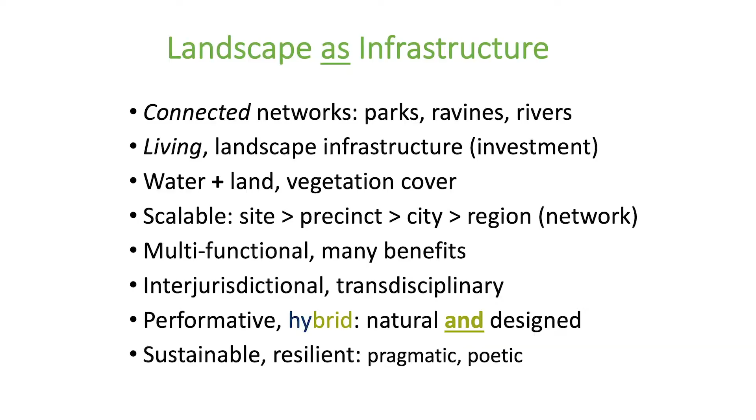So these we're talking about in this lecture are connected networks of landscape. In the Toronto context that I'll use to illustrate examples, they are parks, ravines, rivers, and waterfronts. They are also alive—the infrastructure itself is a kind of living surface. In that respect, when I refer to landscape as infrastructure, this is a kind of investment in water and land. Notice that I'm saying vegetation cover.

Now, I'm not specifying native vegetation or non-native, but rather a broad class of vegetation that at this moment, while we may wish for it to be as native as possible for its own resilience, increasingly as our climate shifts, the gradients, particularly from the equator north into our climates, are shifting and changing the kinds of vegetation we will see. So it's less than ideal to say they must be native, because it will very soon beg the question, what is native? We might more realistically and practically say naturalizing vegetation, some of which is desirable and some of which is not.

So please understand that there are, of course, a number of questions that have to do with social and cultural policy and have to do with scientific research embedded in these statements. I recognize that, and I ask a little bit for your indulgence that I'm speaking at a fairly high level here at this point. I'm also recognizing that we need partnerships to work with experts, ecologists, hydrologists, engineers, geomorphologists in some cases, plant botanists, people who are expert in each of these fields so that we can determine what kinds of vegetation in what place we're talking about. So here, for the moment, it's fairly broad.

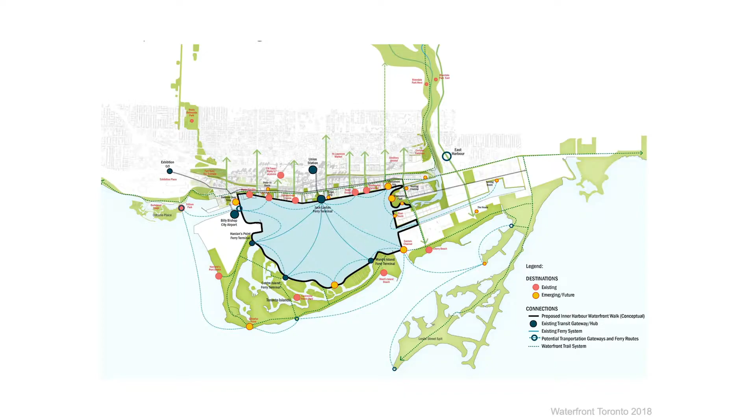There are a number of policies in place, and they don't always work nicely together. No one is particularly in charge here. These are policies that work sometimes in overlap, sometimes with a little bit of tension between them. But they include, for example, North America's first zoning bylaw requiring green roofs. Not innovative in Europe, but in North America, the first initiative for commercial institutional buildings.

Toronto Green Standard sets the framework, regulatory and advisory, for green buildings, for mid to high-rise residential and non-residential or commercial development. We have a parks and forestry policy for green canopy cover of trees. We have a policy that is actually a set of guidelines about how stormwater is to be managed. None of these supersedes the other. We also have an official plan that sets the vision for the city that works in tandem with zoning bylaws. So this agglomeration is really a mosaic of strategies we can use to advance green infrastructure. We don't always use any of them in some places of the city other than the official plan.

As a waterfront city, our city has for the last 30 years been studying contamination on the Great Lakes, in particular in Toronto, which is one of many areas which were called remedial action plan areas. Over the course of development in the 20th century, the ports and harbors became contaminated. This would not be a surprise to you as a shipping city. And since the decline of manufacturing and the move towards a more knowledge-based economy, we've seen these areas stagnate.

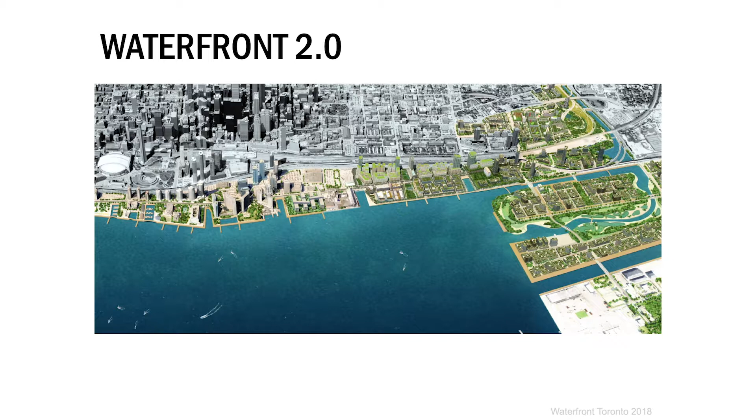And I want to hop through it, if you will, in a kind of a design tour of the nature-based or landscape-based solutions that are building this area out. They are not being designed specifically as standalone or isolated parks, but rather as a connected system of landscapes that will host the next generation of our city dwellers.

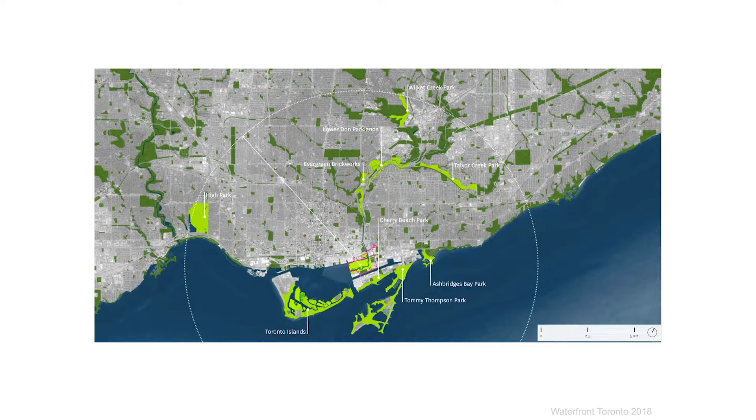They are in part capitalizing on existing local parks, but also making new destination parks as the entire riverfront and lakefront are designed together. The areas highlighted in green show you some of those. In light green are areas that are new and changing or being reformed. Areas that are in dark green are existing areas that are more naturalized, that in some cases are going to have design interventions that connect them to the light green.

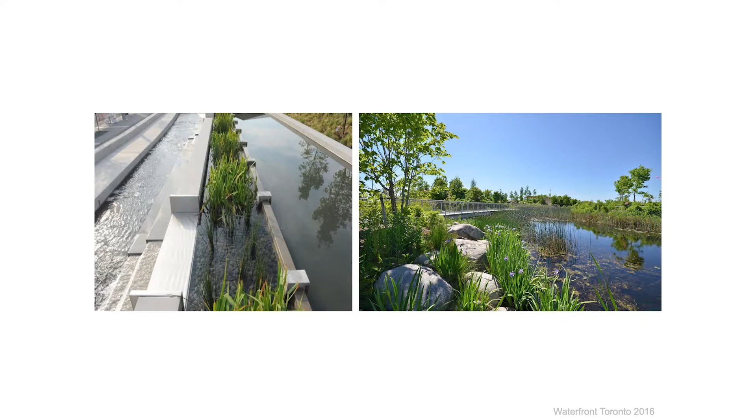These parks along the waterfront: on the right-hand side of the screen, we're looking at Corktown Common's Iris Garden, Stormwater Garden. This is part of the flood protection berm that protects this area of the city from flooding by the river. And on the left-hand side is what looks to most people like a pleasant water feature. It's pretty, it has daylilies in it, or rather blue flag iris in it. It is actually a stormwater infiltration and cleaning swale that takes water from a series of parks back to the lake. In fact, it represents also a challenge to the city.

This park was budgeted to be a naturalized, nature-based solution to stormwater overland flow. And city engineers and city parks people are in two different departments. And the city engineers did not have confidence that green vegetation would do the job, that it could treat the surface waste, and this is principally E. coli bacteria from dog parks and from people in the park. The water is treated before it returns to the lake. And so what they did was insist that the development add on a UV filtration system underground.

So this is an example of a nature-based solution, a piece of green infrastructure that was designed to do a job which some would say it could. The engineering department had never approved one of these and wanted to make sure it would work. And so an additional significant investment was required to build a UV treatment plant.

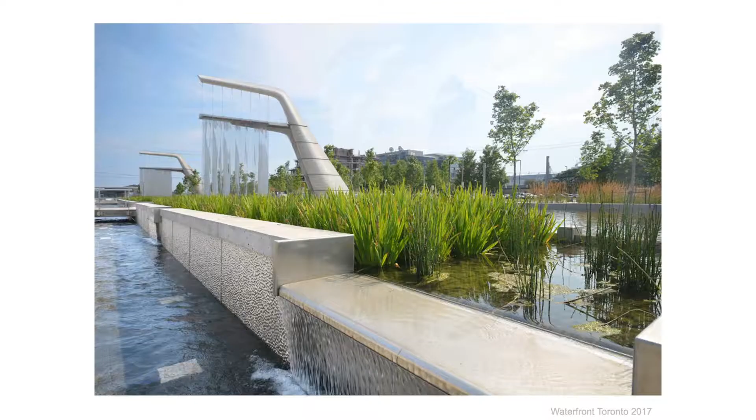One wonders whether that's necessary. So we don't always have confidence in these designs. The art sculptures at the back are by Jill Anholt. They're part of the park's appeal.

And it is also an architecturally significant park. It has a pavilion, very beautiful pavilion designed by Steve Teeple, and a skating rink in the winter or a pond in the summer. So these can be several things at once.

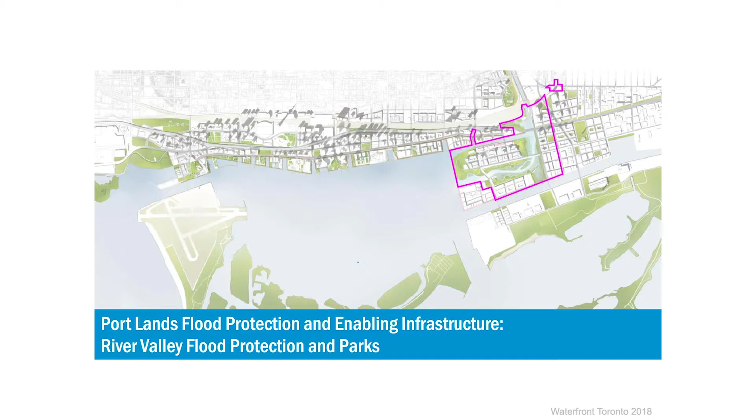The major piece of investment in this area is a flood protection infrastructure that is on a scale our city has never seen before. This is 290 hectares inside the pink square and is designed to protect the city from the lower portion of this river, which is the downstream part of the Don River. It's a 365 square kilometer watershed that drains into this pink bounded area.

And what's interesting about this watershed is it's the largest urbanized watershed in the country. So there's a lot of detritus and contamination that is coming down this watershed into the river area, and it can flood in a flash storm quite severely.

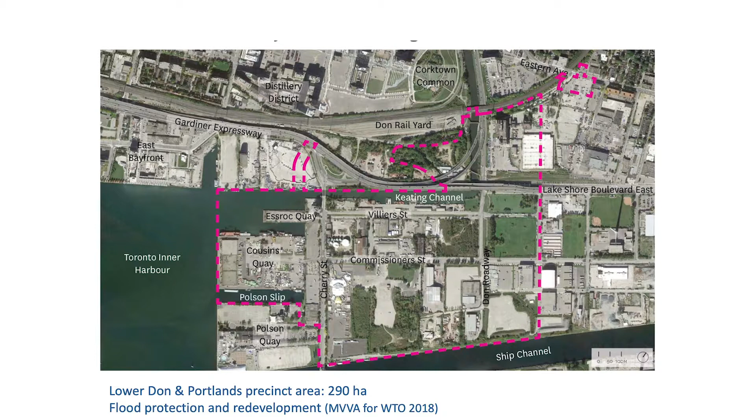So this is what the area looks like now. It is a post-industrial area. It's been quiet, you might say, economically for the last 30 years. And it's slowly being rebooted economically by new industries and mostly by a major change to the river, which is going to cut through it.

And it will also move about 1.4 million cubic meters of soil. It's going to excavate from these areas to create a new lake, or a new river rather. And in doing so, will allow the river to divert away from a more built-up portion of the city and therefore protect from flood.

It's a new river. And one has to ask the question, how do we design for a new river that is intended to look and feel like a river, but must be armored in an engineering way? It doesn't look like a Dutch dike. It doesn't look like a ship channel. It looks like a real river.

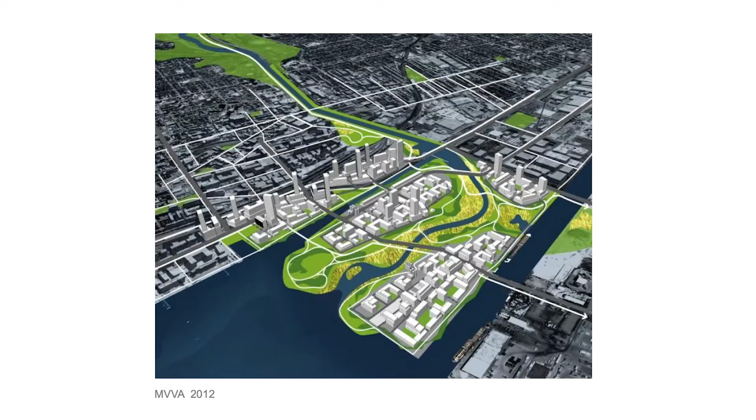This is an area of the city that will be defined by the river, rather than having the river subsumed and defined by the city, which has been our traditional approach to doing things. And certainly in most European cities, we have rivers that are constrained and defined by their cities, not the reverse.

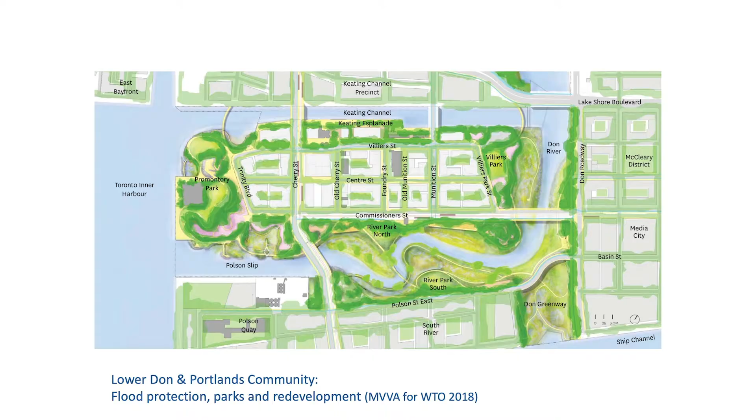This is an artist's rendering from MVVA. Michael Van Valkenburgh Associates are the landscape architectural firm. And of course, there are a number of hydrologists. As you might imagine, this is a major hydrological engineering challenge. It's also interesting; to make this river look natural is challenging. So it combines a number of different areas of expertise in doing so.

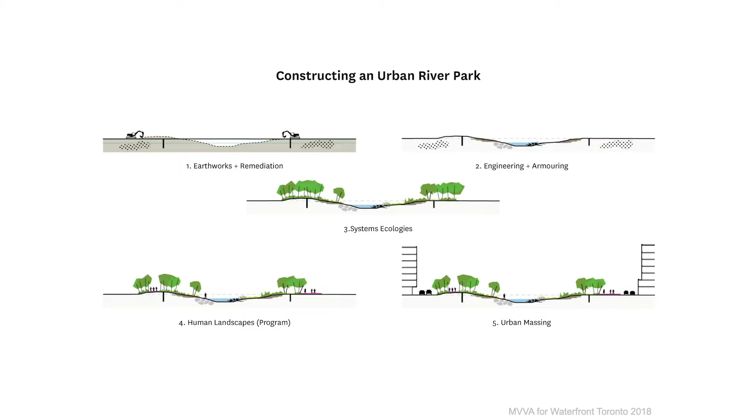So the investment potential here is principally in flood protection, but the benefits on top of that $1.25 billion investment are enormous, with 6 new parks, 4 schools, and a community of, let's say, approximately at the low end 70,000 people. We have systems ecologies that have to be considered, in addition to the standard hydrological engineering, which actually is not standard because the river doesn't look like a channel anymore.

We also have many layers of human program that will go into this for recreation, cultural diversity, non-traditional sports fields, and most importantly, from my perspective, an accommodation of new urban biodiversity in these parks. They'll be designed very differently from our traditional parks by virtue of the river.

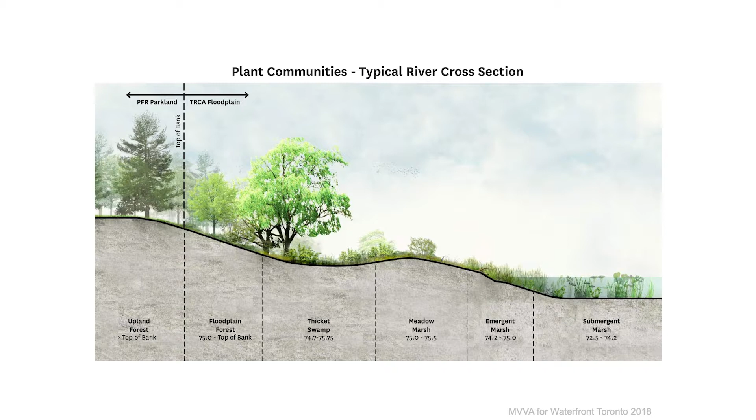And of course, the urban massing around this, which you'll see in a minute, is rather substantial. It's meant that this project also was led by landscape architects, not by architects. So landscape architects here are giving form to a new community. Typically we have architects that give form to a community, and the architecture will work with the landscape. It's not to say that they're not involved, but we begin the investment in green infrastructure with the landscape itself.

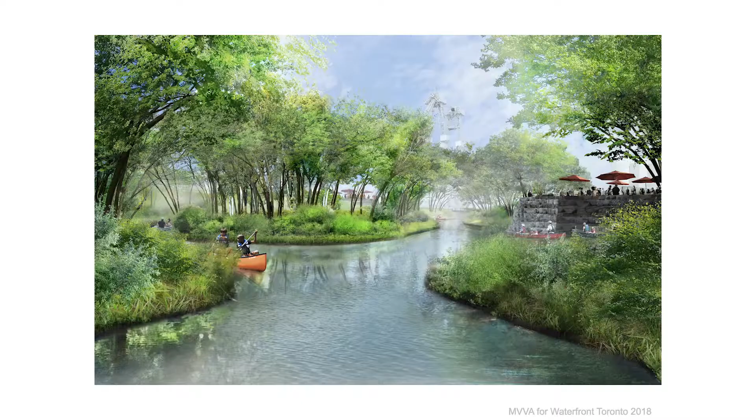And the images are projective. They're meant to show our population, our citizens, what is coming. How will we use these places? What will be the range of possibility? To date, we don't typically see downtown major urban centers with canoeing in them, for example, or kayaking, or turtles necessarily. And the parks that are planned are multifunctional.

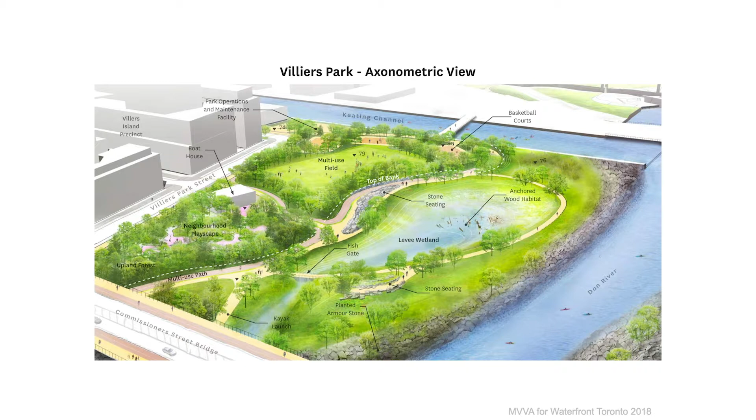They're planned as stormwater retention, wetland soaking and holding, with levees to protect from flooding, but at the same time giving topography, an introduction of 12 meters of topography in an otherwise flat landscape. 12 meters to allow for vistas, promontory viewing, walking, and of course, flood protection. So these, again, are multifunctional.

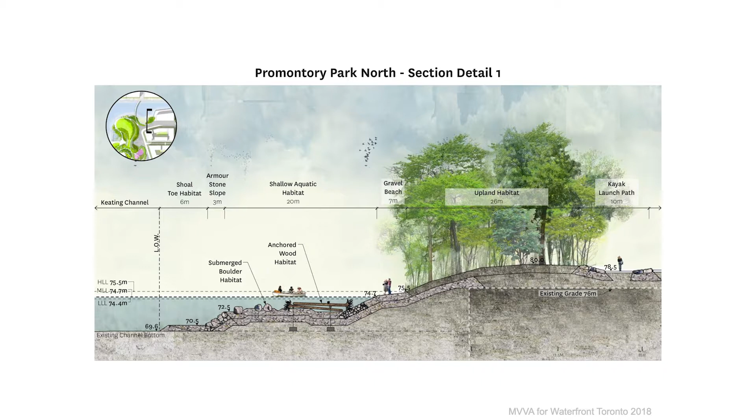And you can see from the sections, what's interesting from a design perspective is we've included ecological science, hydrological information, bathymetric data, so bathymetry of how deep the water is, to show a landscape below the surface of the water. We rarely see landscapes, aquascapes, as part of our city planning. And when you see the gradients here, you can understand how these shores are being naturally armored as well as armored with traditional engineering.

And of course, the lake is still functioning as a shipping channel. You can see in this image, we're reminded of the industrial past, but also the commercial present of the lake. It's not disappeared into memory. Some of these gradient habitats are of interest if you're in landscape architecture or aquatic ecology, because again, they're taking place in a city center. This is not a nature preserve, it's an active part of the city center.

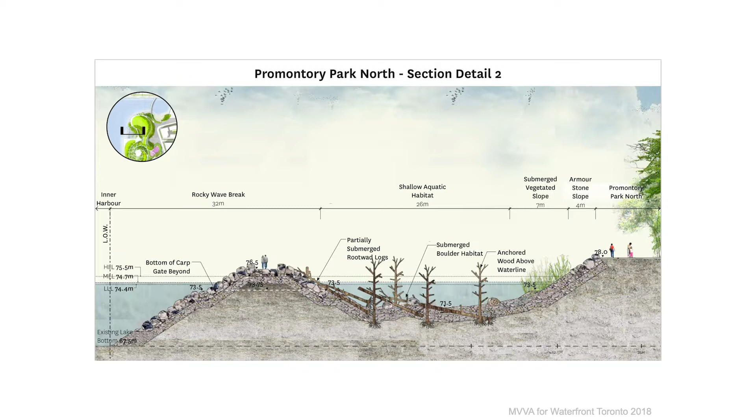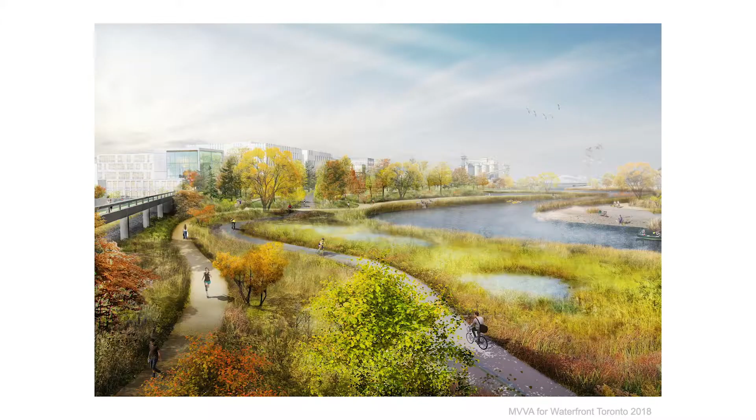They're also intended, of course, to be seasonal. These images are capturing our full 4 seasons, as you also enjoy in Stockholm. And most importantly, they don't just get shown in the summer. In all of the images, we see active transportation, people moving in ways that are not car dependent, which is one of the key missions of Waterfront Toronto, the organization that will stitch together and oversee these landscapes.

So what about connection? The linkages and the connections between these new spectacular areas of capital investment are critical. These can't be gentrified islands. The $1.25 billion investment cannot be only for citizens who don't yet live here. It has to be for the whole city. And when we think about the connections to the regional network and to urban biodiversity, we have to give safe passage, place to move for everyone, from young children to our senior citizens, as well as wildlife. And that's a tall challenge. It's a big order to do this.

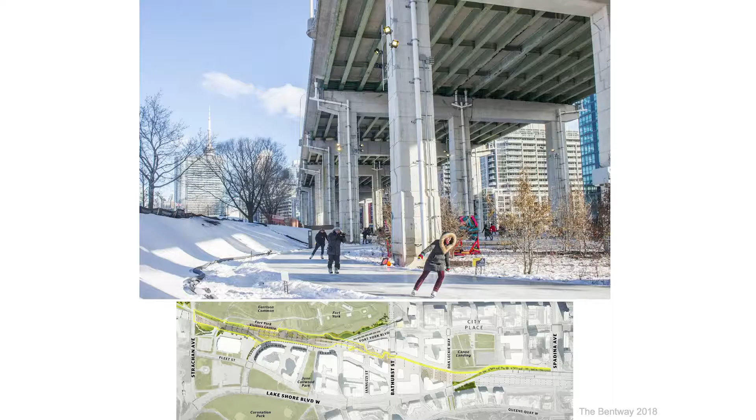We're looking at exploring connections between some of our more interesting parks that have made use of desolate and derelict areas. This area under an expressway has been turned into a skating trail. Our capital city of Ottawa has an 11-kilometer active trail for skating where people are actively using it to get from one place to the other, in the same way that Stockholmers used to.

I say used to because I don't know how many days the archipelago now freezes, but in historical imagery we see lots of people moving between the islands by skating. We don't know whether that is still possible under our changing climate. We hope that it is. It certainly adds to the robust ways of connecting through our city.

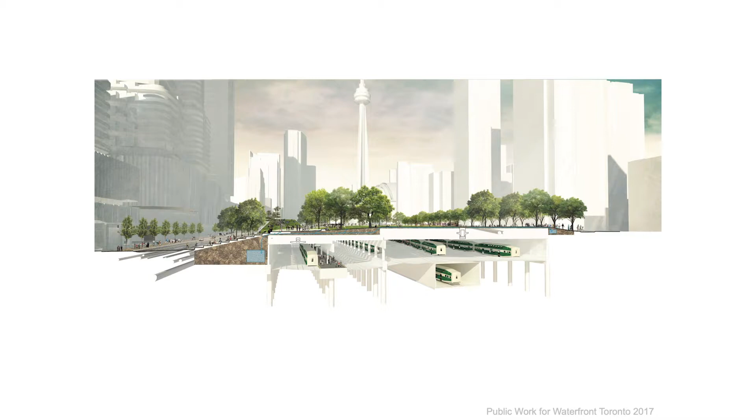We're even imagining multi-layered parks that make use of our gray infrastructure, another billion-dollar investment projected for the downtown core, where we have no possibility of at-grade park space.

In high-density urban areas around the world, we're challenged to make new surfaces for parklands. So we might think about green roof approaches that are low to the ground, in other words, an at-grade park being built over a rail tunnel. This is a proposal for Rail Deck Park in the city of Toronto, not unlike Hudson Yards in New York City.

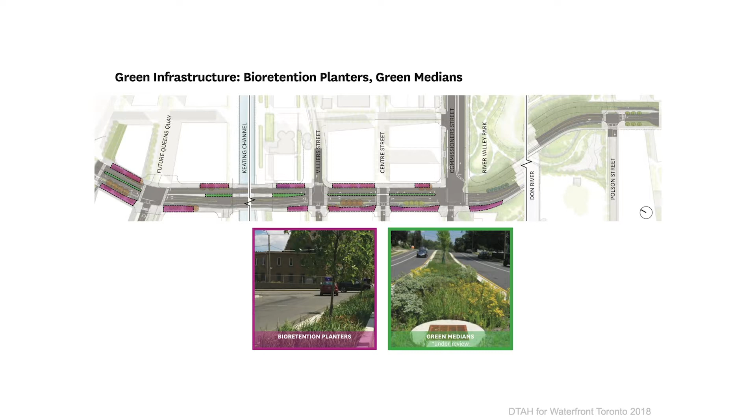Some of them are as yet untested. We don't know how well the bioretention planters and green medians will do. Our city doesn't yet have a mechanism to approve green medians in the same way that Amsterdam does, for example. But we're trying. We're testing in a place that has this big investment.

On the waterfront in the Villiers Island community, we're looking at pollination gardens, bioswales, all of these multifunctional planting infrastructures that are also about water holding, which need to be part of our streets. They need to take away a lane from the automobile and give over to the capacity for slowing, holding, and greening.

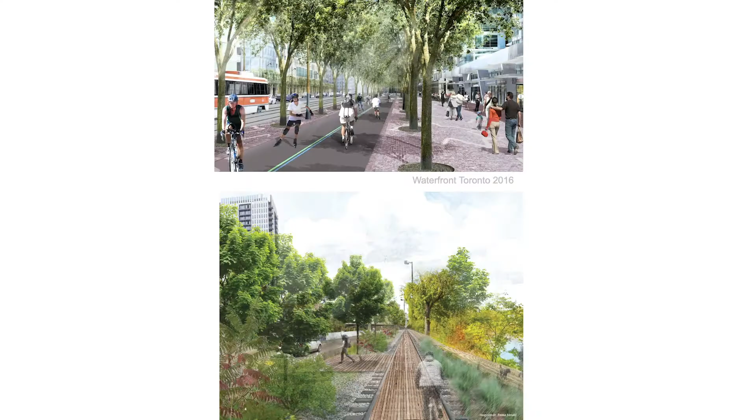Now we think about how to reintegrate the road, burying the service lines deeper and removing some of the road-based commuter possibilities, introducing active transportation and habitat possibilities. You can see in the lower image, completed by my students in a studio, this is intended to show multifunctional possibility for habitat. But of course, all of this has to fit in a limited range.

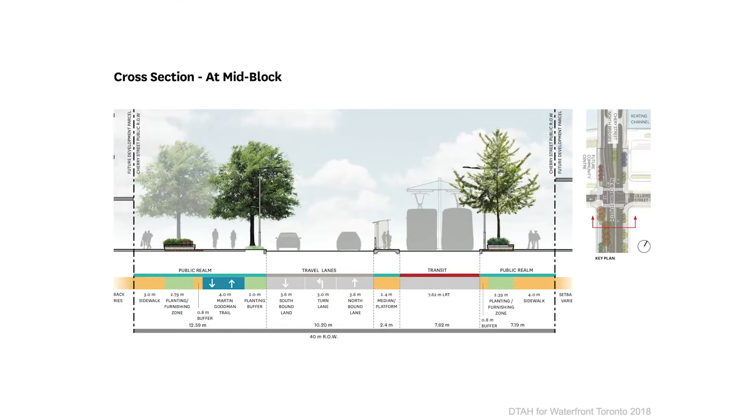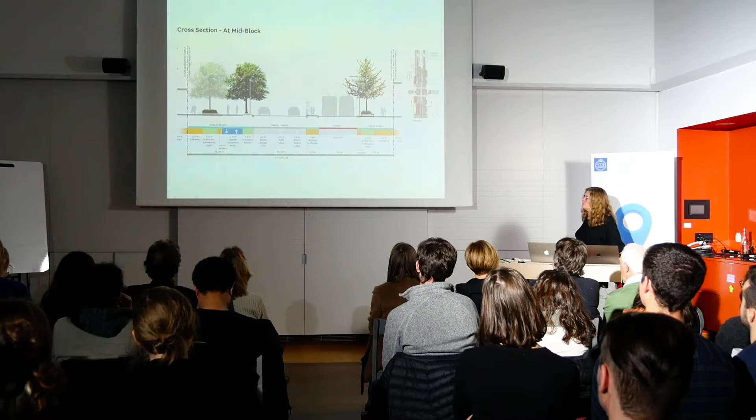There's also the question of autonomous vehicles, whether many will be chained together like a train, or individually and privately owned - we don't know. But we have to rethink how the street works, and that's what these cross-sections are intended to do: shrinking lane widths, moving some traffic off the road, and giving that space to a much richer, more diverse opportunity.

These are not all native plants. They have to be hardy - they have to withstand our salt treatment in winter, and the addition of combustion byproducts from cars that are still there, even if they're autonomous. We don't know what fuel they'll use. Hopefully they're electric, but we don't know.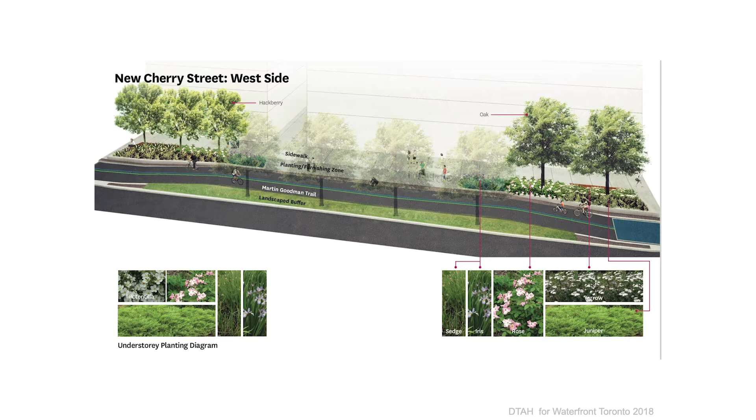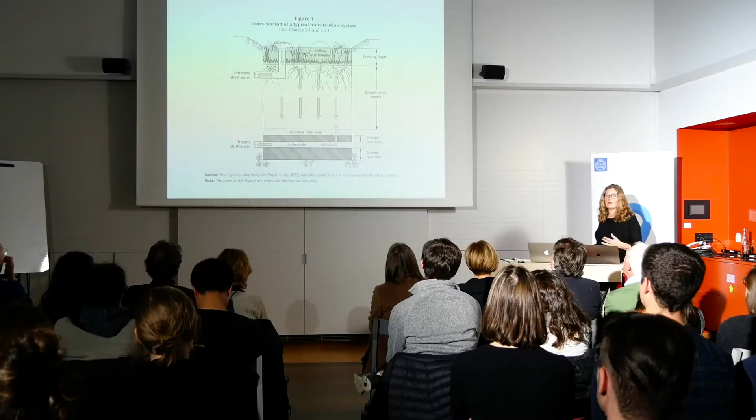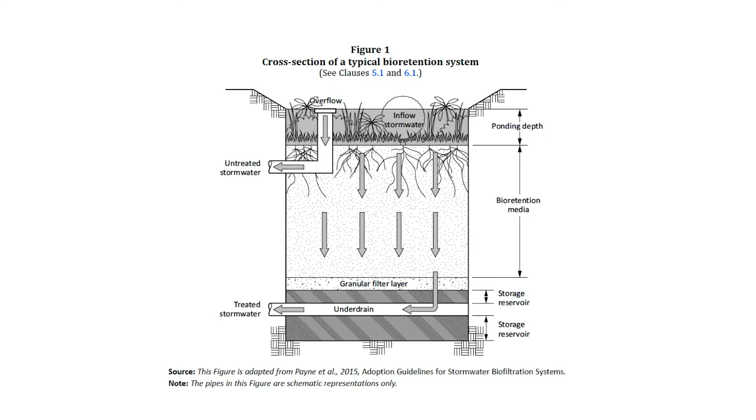These images are designed to show what's being planned for these new communities, with different sized streets but always a separated cycle path, which in our city is very unusual - a new concept. While it may be standard in many European cities, we're thinking about how to use separated cycle paths to also serve as bioretention swales. Can we do double or triple duty? Can we use that surface with a relatively simple, known technology of bioretention below grade?

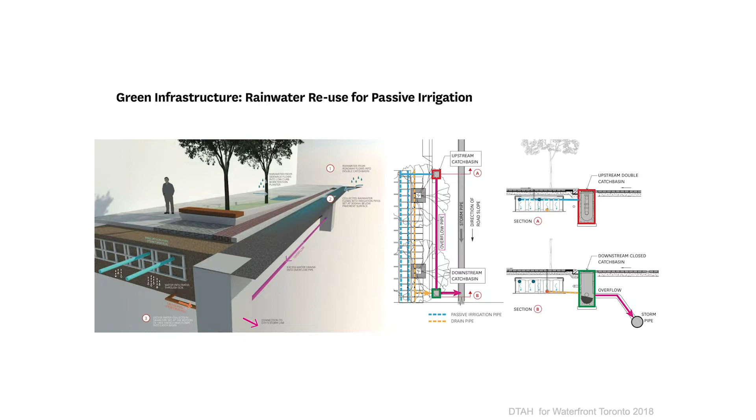Sometimes the bioretention will be part of the median, as shown in this section. Other times these catch basins will be connected to planters adjacent to cycle paths. Sometimes the cycle path material itself will be porous. These are untested in our communities, though tested individually in many places, but they're being combined here and scaled up as a kind of networked linkage.

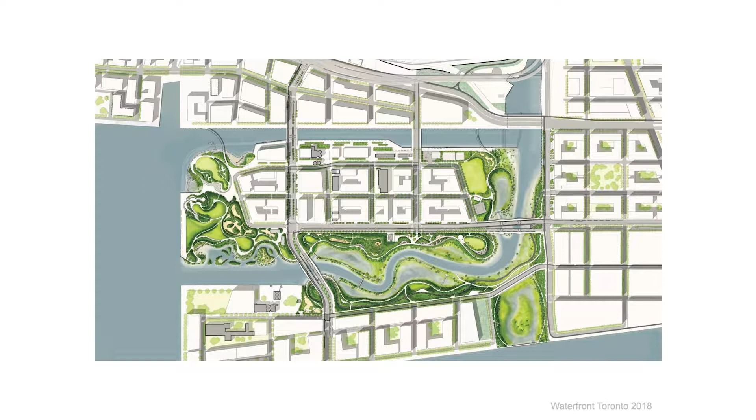So this is where the streets will go, highlighted on this diagram I've just shown you, again fitting within the framework of the green park and river system.

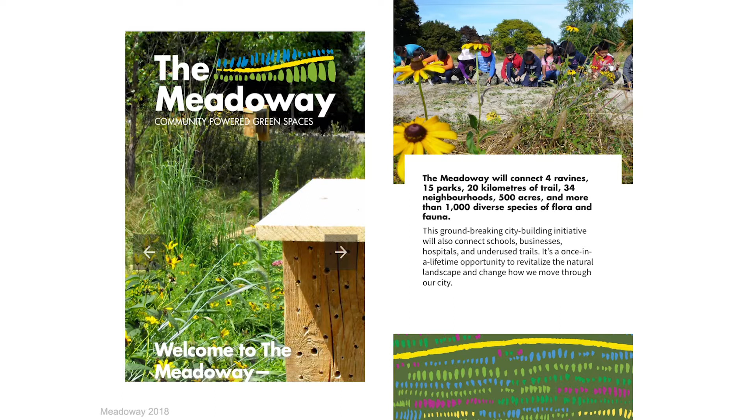Another opportunity for connections and linkages is the repurposing of old infrastructure, something we may see more of in European cities, where you necessarily have to make and remake your landscape surfaces as times change and needs must. The Meadoway is a new project, but on old infrastructure - it's a new name for a hydro corridor by any other name.

The hydro corridor connects 4 ravines, 15 parks, 20 kilometers of trails, 34 neighborhoods, 500 acres, and more than 1,000 species of flora and fauna - most of all, insects for pollination. Some of the ground-nesting bees in Toronto are quite rare regionally, and our urban areas are known to host species of local importance, particularly for pollination.

When we talk about pollination, it sounds very scientific, but when we show images of plants in motion with children in the gardens that back onto this hydro corridor, we get a very different image for how we might project a future for this repurposed infrastructure.

The hydro corridor looks like this - it already has some trails in it. What's most important about its investment is that it's a public and private partnership, which for us in Toronto is unusual - a departure from the norm. We're becoming less and less of a socially supported welfare system and more of a public-private collection of operations. In this case, a charitable trust gave money to the city to partner with them and the regional government to turn this hydro corridor into active park space, not just for moving people but also for biodiversity.

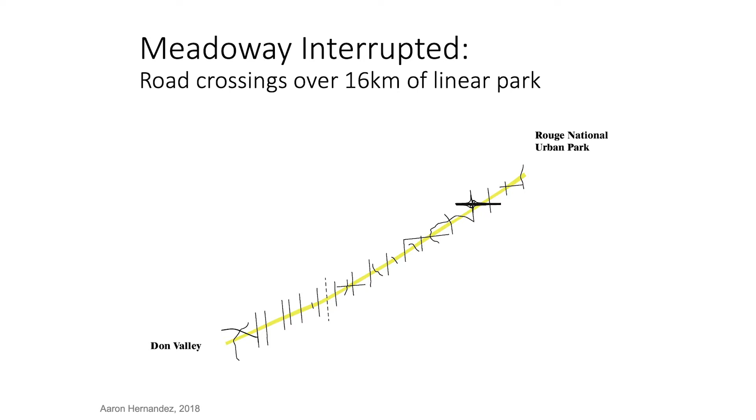You can see by this image our students in my lab modeling: is it really a continuous linear park, or are we really talking about a pathway with a number of fragments and cuts within it? The reality is there are 32 arterial roads and streets that cut through this park. We can't really say it's a safe passage or connection for wildlife and people yet - we have work to do.

We can show it as a green line or a yellow line on a map, but the reality is it's interrupted. We need to find ways in this 16-kilometer linear park to make it safe for people and wildlife to move. Otherwise, we don't fulfill our mandate of connection.

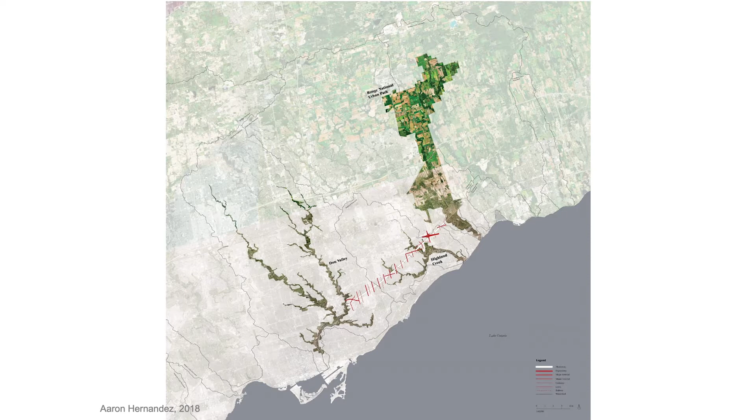You can see how important it is on this image, I hope. The Meadoway, or the 16-kilometer linear park, otherwise known as a hydro corridor, traverses between these green ravines on the map, making it a very important east-west connector. So it's worthy of investment, both ecologically and socially.

That brings me to the final section of thinking about leading with landscape, which is really scaling up to the region. We can't invest without a connection to the region. Otherwise, these become fragmented and isolated islands of green wealth.

They're inevitably going to gentrify. We know that wherever we have built parks first, housing prices go up. The Waterfront is a terrific example where we have the most money spent in the city's history on parks being spent along the waterfront for tourists as destination parks and for people who don't yet live there. Meanwhile, in the back end of the city, in the north, we have decaying parks, underserviced parks, in neighborhoods that have little access to green, which is why we need this regional approach.

We also need it for the movement of wildlife from riverfront to lakefront and up into the ravines. And that's because Toronto is a ravine city. What does it mean to be a ravine city?

Well, here's an expressway that runs through one of them. But these are deep folds within the landscape. In this map, you can't really see the relief. Toronto looks very much like a flat city, but that's because the glaciated nature of our city means the rivers cut down. So the city may look flat from an airplane, but standing at grade, we have these deep folds hidden in plain sight, which are called our ravines.

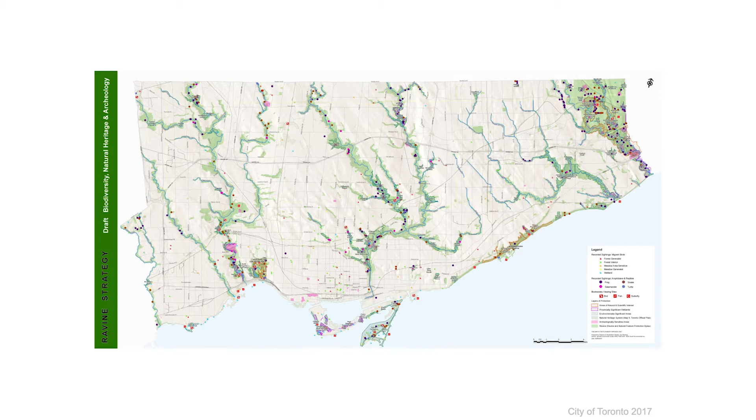This map gives you a sense of their connectedness, their trails. Three major rivers from west to east, the Humber, the Don, and the Rouge. And the stream systems that they connect carry water from the headwaters to the lakes. A very important water-based system in these watersheds.

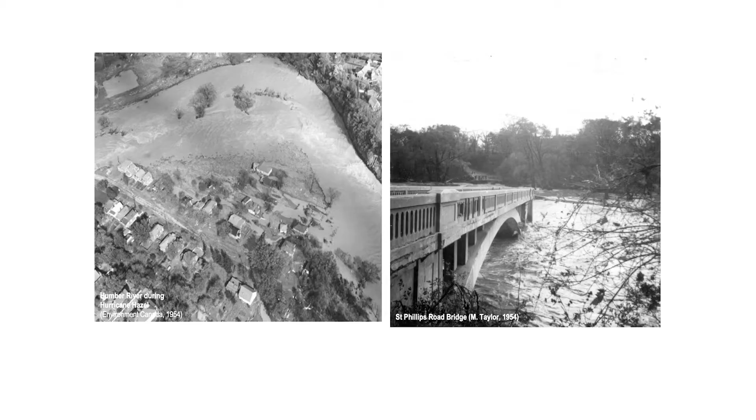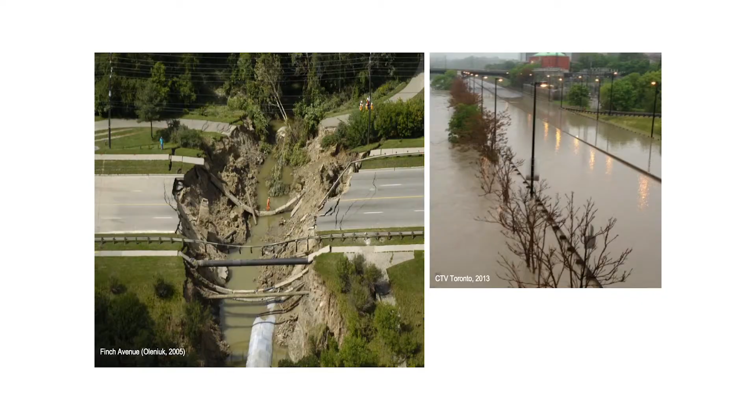But they've historically washed out in storms. They've been hazardous. In fact, in 1954, Hurricane Hazel resulted in a number of deaths in the city, washing out all of the major bridges across these ravines and compelled the city to protect them. That doesn't mean this doesn't still happen. In 2005, the remnants of Hurricane Katrina from New Orleans landed in Toronto as a tropical storm, and we had more than 4 viaducts and bridges wash out, reminding us that the landscape is always there.

Even if we don't see it and we don't read it, it's always there. You can see the tangle of human-made gray infrastructure still hangs there in that image to the left, but the river is moving. The river is always moving underneath. So this compels us to think about landscape infrastructure as worthy of our capital investment, just as the pipelines you see there, to prevent that lower flooding that you see on the right side of the image.

We've seen 3 record storms in 4 years, 2 in 1 year between 2014 and 2018. We had 2 in 2013. This really is part of the major investment in protecting these ravines from development and ensuring that they are robust contributions to the landscape network.

The profile looks like this when I said we're a city of a folded landscape. They dig down sometimes up to 50 meters in places, and you have nice views down into the ravines, which can be very secretive, quiet places to walk. They're also places for urban wildlife, some of which is very common. Sometimes it wanders and we see wildlife in our major streets.

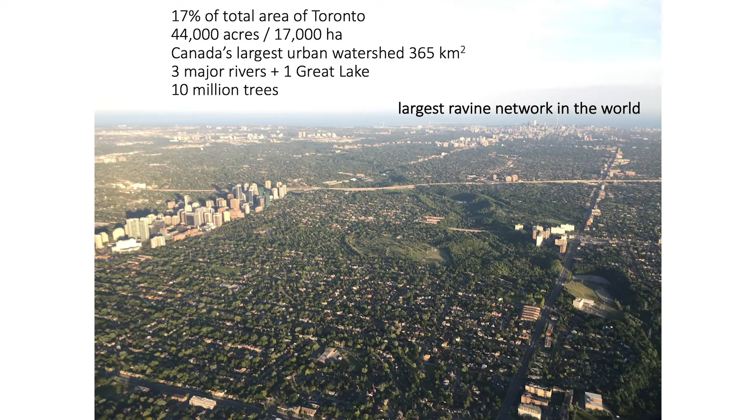Again, not unfamiliar in Stockholm, you sometimes see wildlife regularly on the outskirts and in the wedges. But these are very compelling images of the ravines, worthy of investment I think, to show you the extent. A flyover image maybe gives a better sense that this is 17% of the total area of the city, of a downtown area of almost 3 million people. At 17,000 hectares, we would argue that this is a huge park network that's hidden in plain sight. It's not recognized as a park, but with a policy structure, regionally, it's now being called a park system.

So 3 major rivers, 1 Great Lake, 10 million trees. That's doing some serious carbon sequestration as well as urban biodiversity. Our strategy, which came into effect this year, is really about justifying the capital investment in the protection of the ravines as well as the addition of these new parks I spoke about. It's also about celebration, the celebration of place and a landscape identity that is meaningful to people. I spoke earlier on at the beginning of this lecture about the importance of a landscape identity, or the recognition of how cities connect to their places, the places that sustain them.

And for Torontonians, whether they be newly arrived or not, the ravines are often a gateway to the landscape that defines the city. And these are all recent examples of how people have talked about the ravines as an effort to invest in protecting them.

I like this particular image described as the physical soul of the city, under the bridges, in the secret underbelly of the city. They're not well marked or well signed. They need extensive connections to their trails. Some are very vernacular. They really don't have a lot of capital investment, and they may not need it. They simply need to be signed and connected.

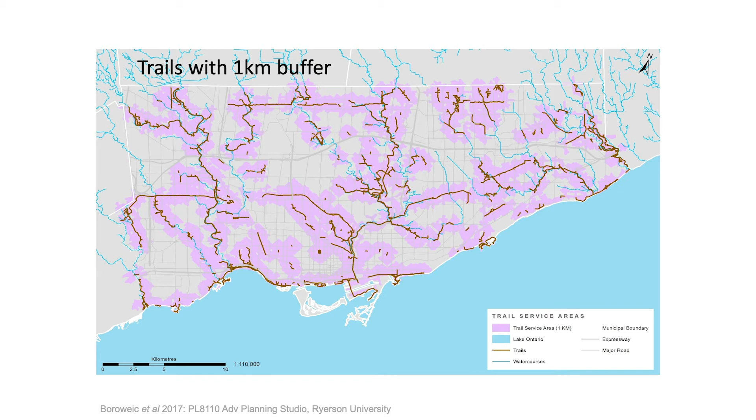My students in our lab for the last 5 years have been doing research on these ravines in terms of how close they are to public transit, how close they are to walking, where neighborhoods need the most investment in signage and wayfinding, how people can benefit by being pointed to a ravine area that is available to them but they may not even know about.

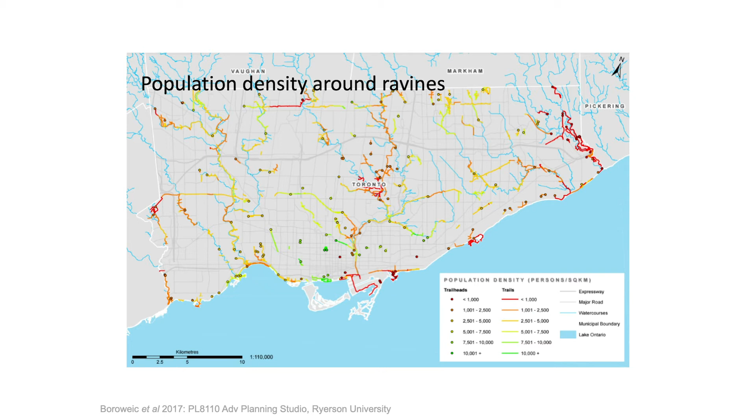In other cases, we've looked at areas where improved connections need a portion of the capital investment. So rather than just piling money into the glamorous waterfront parks, we are asking the city with this research to distribute that investment to the areas in highest need, both in terms of biodiversity and cultural diversity and cultural need.

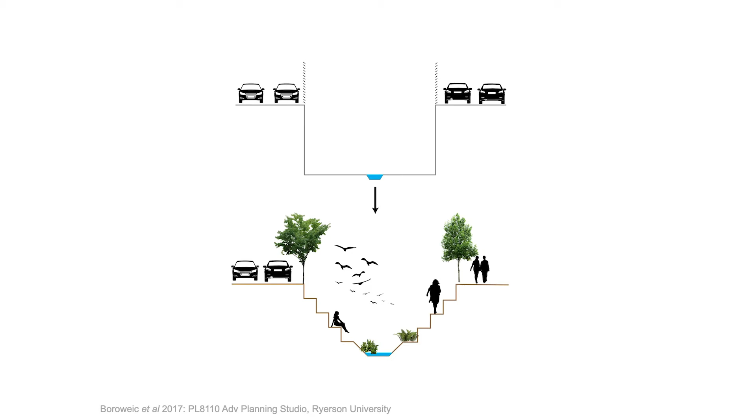Some of the images that we've been working on to design the edges of the ravines are to see them less as a channel for stormwater and more as an accessible gradient for people walking, biking, and moving, not just on a pathway at surface.

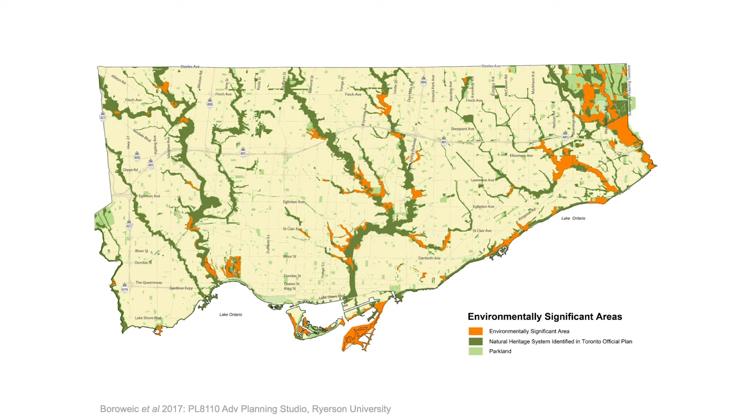They're also home to a number of our rare and endangered species, particularly the areas in orange are areas that are designated environmentally significant. And you can see that almost 58% of any wildlife you're going to find, particularly around migrating birds, are going to be seen in the ravines, as well as your best chance, your really only chance of coming across our reptiles and amphibians.

Historically, they're important to us, and that's another reason that we think of these projections as also reflections of our past, the connection to the city's use of its parks, old trails for skating, some of which may never freeze again, but we've replaced with artificial rinks, and of course flooding, which is part and parcel of what it is to be in Don River Valley Park.

Part of our strategy has been to rename these places, give them names that inject fresh inspiration and celebration, and of course, sometimes kick-starting a conversation about what is already hidden in plain sight that can be capitalized upon.

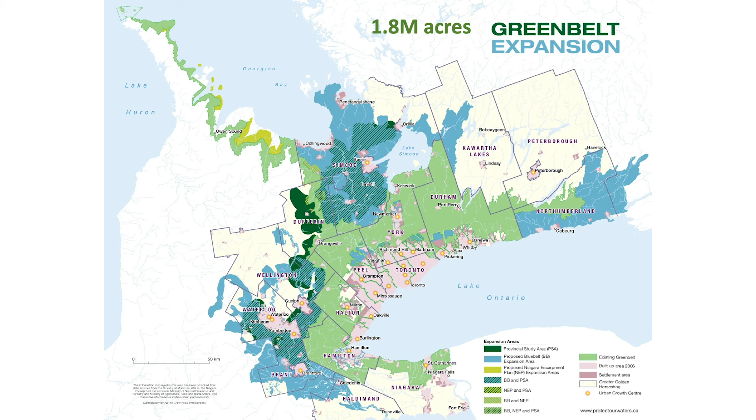All of the ravines that I've spoken about, the linkages and the trail connections, and the waterfront here connect into the city's hinterland, much like Stockholm's green wedges connect into your peri-urban areas for amenity landscapes of enjoyment, skiing and picnicking, hiking, canoeing, and so on. This area is also food production, as you would also recognize.

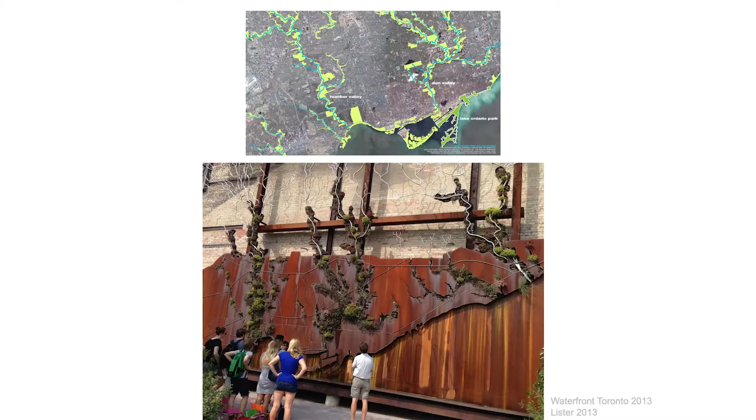1.8 million acres of greenbelt. It's 800,000 hectares now. This is an area around the city that feeds into this ravine connection. And it's even been created in an artistic sculpture in the downtown core to remind people where their water comes from, where their food is connected.

These linear connections of the ravines are not just trails for walking, but also connections for flows of food and water. It's also given rise to a conversation about whether parks can be blue. Our inner harbor, much like Stockholm's archipelago, is it worthy to call it a park? It's for recreation, for fishing, for enjoyment, and also part of your landscape identity.

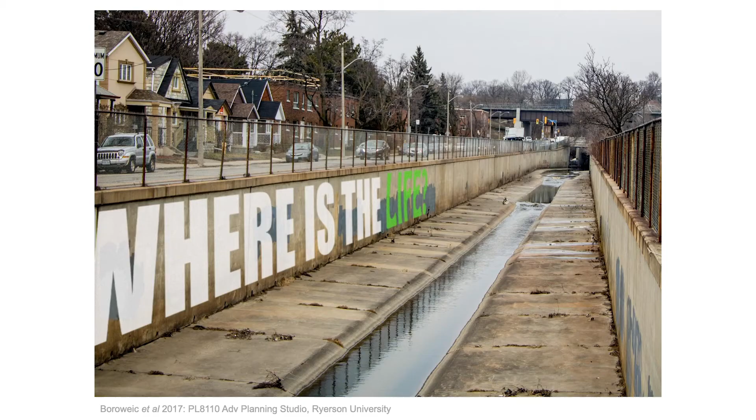So we think of the harbor here as a new park that is, again, hidden, waiting to be named, recognized, and invested in. And we use these water courses for movement, not just of goods, but of people, of fish, of birds. And they can be so much more than what we've done in the past, which is to relegate the water to a drain. That's the way we used to think of infrastructure. And this is the way we now think of infrastructure.

So I hope that what I've talked about today is an example of how we can, with strategic investment, think about leading with landscape. Leading in our architecture as much as our policies and planning, as much as with our engineers and our communities. And that's really what I mean to say by invest in green infrastructure.